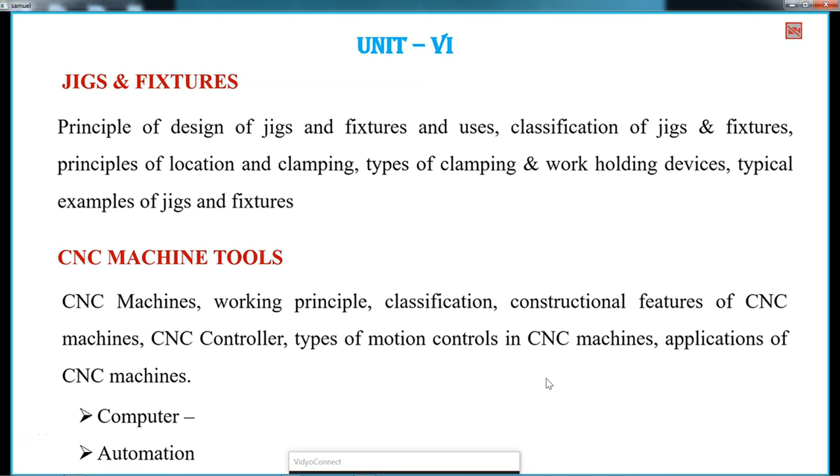We have been dealing with various topics in this course. I don't know if you recollect what we studied first. Can anyone say what the first unit was? Fundamentals of machining, where we studied the basic principles of metal cutting. So metal cutting is actually a metal removal process.

Somebody said that when additive manufacturing came, earlier manufacturing was negative, and now it became positive. So that's what they say. Manufacturing means removing the material and making the shape. But nowadays we have processes called additive manufacturing processes, where we build the wall or the structure where it is required.

So probably toward the end of this course, we'll talk about some of the advanced manufacturing processes, and in that we'll include even additive manufacturing, so that you are aware of the latest machining processes going on in the industry in the present day. So the fundamentals of machining means metal removal processes. Even the title of your course says metal cutting and machine tools.

So additive manufacturing, 3D printing, and all these layered manufacturing kinds of processes are not included in this. So probably we can ask your professors to revise some of the syllabus in the coming semesters, so that you will be aware of the latest developments in the manufacturing area and also in the industry.

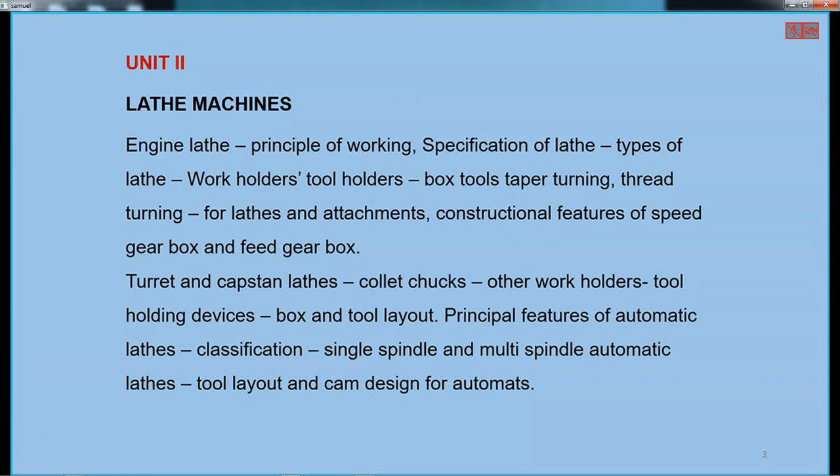So if you understand the basic working principles of the lathe machine, you can understand other machines easily. We have looked at the basic machine tool structure, various functions, and other topics related to the lathe machine. Next, we looked at the shaping machine, the slotting machine, and the planing machine. Lathe, shaping, slotting, and planing machines use the single point cutting tool.

Though literally it may not be a single point, it is not an edge, but a point or a small portion of the tool that makes contact with the workpiece. All these come under what are called single point cutting tools, and the lathe, shaping, slotting, and planing machines use the single point cutting tool.

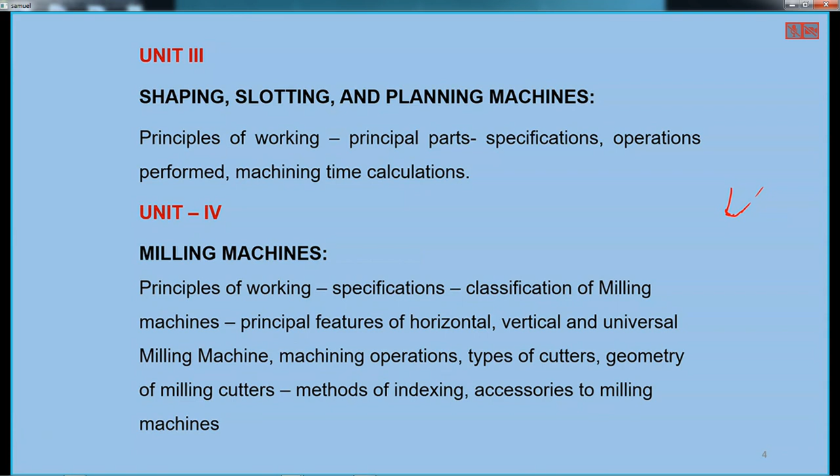Then later we talked about the milling process and milling machines. Milling machines use multi-point cutting tools to remove the material. We looked at various milling processes, the basic processes like face milling and end milling. Then we looked at types like up milling and down milling, various cutters, their geometry, their methods of indexing, and different types of milling machines, their structure, and their main components.

Then later we moved on to the finishing processes, after you do the basic machining operations. As I already said, overall manufacturing operations can be put as primary, secondary, and finishing operations. Primary operations generally include metal forming, casting, and forging kinds of processes, which give the basic shape to the component. Then we do the machining to bring them to the exact size, shape, and required surface finish.

Then under the tertiary processing or finishing processes, highly finished surfaces with high requirements of tolerances and surface finish can be achieved by using these finishing processes. And the basic finishing process is grinding.

We looked at the grinding process. Though each abrasive has a single point cutting edge which makes contact with the workpiece while removing the material, there are several such abrasive particles, and their sharp edges make contact with the workpiece simultaneously. That is the reason the grinding process also comes under multi-point cutting operations. Then we looked at different types: cylindrical grinding, surface grinding, tool and cutter grinding, and others.

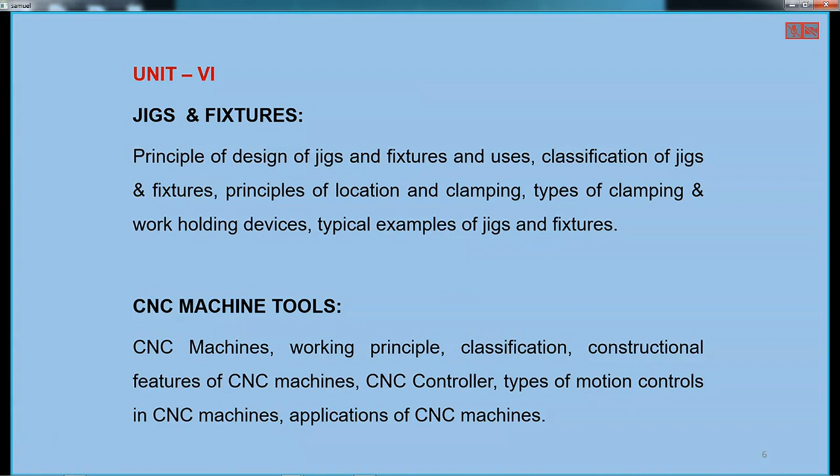So it is tool design. Tool design means it is not the metal cutting tool design. It is not the cutting tools, but here tools means the jigs, fixtures, and the press tools. That is the reason it is called tool design. The name of the textbook is Tool Design by Cyril Donaldson, George LeCain, and other people, but generally it is referred by Donaldson's name, who is the primary author. You can refer to that book for this particular unit if you need more information.

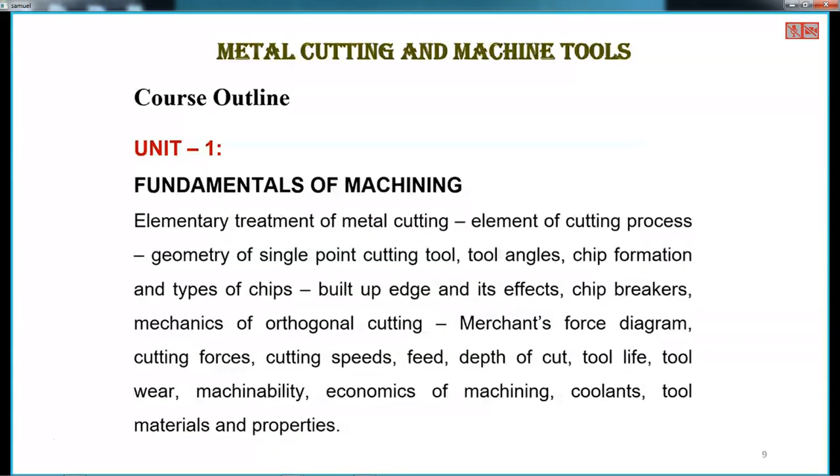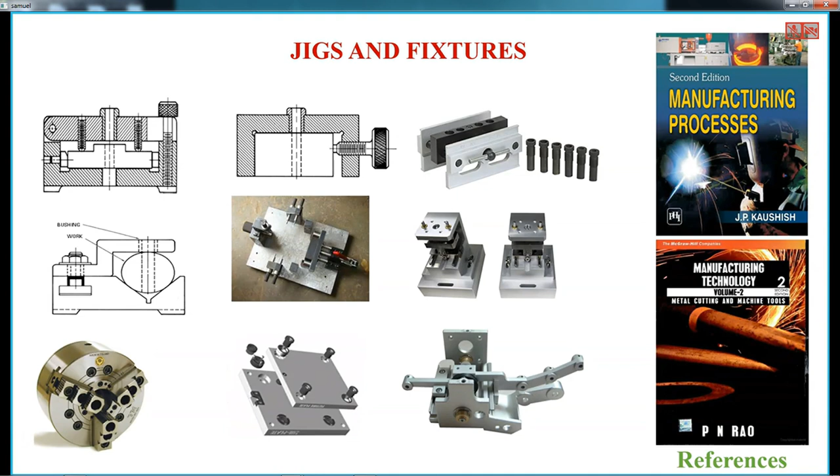Coming to the jigs and fixtures. If you go to the shop floor, you hear this term; in the workshops in your colleges, you may not hear them. Jigs and fixtures are more production kind of devices. If you go to any industry, without jigs and fixtures you can't work. So you need jigs and fixtures. We'll see what these jigs and fixtures are.

As I said, successful running of mass production depends on interchangeability to facilitate easy assembly and reduction of the unit cost. If you go to industry, you know what they'll be talking about? They'll be talking about production and cost. The technology assists them in achieving these two. Yesterday we had visitors from an automobile manufacturing industry, and they were talking about how production is important.

He was talking about the gearbox used in an automobile. In that gearbox, there will be 47 or several gears. If somebody manufactures only 46 instead of 47 gears, the cost of the gear may be around 500 or maybe 1000 rupees maximum. But you know what loss the whole industry faces if one gear is not there? Without one gear, you cannot assemble a gearbox.

If there is no gearbox, you can't assemble the vehicle. If it is a large truck costing about 50 lakhs or even higher, or a car costing around 10 lakhs, then if you don't make one gear, one car or one truck is less.

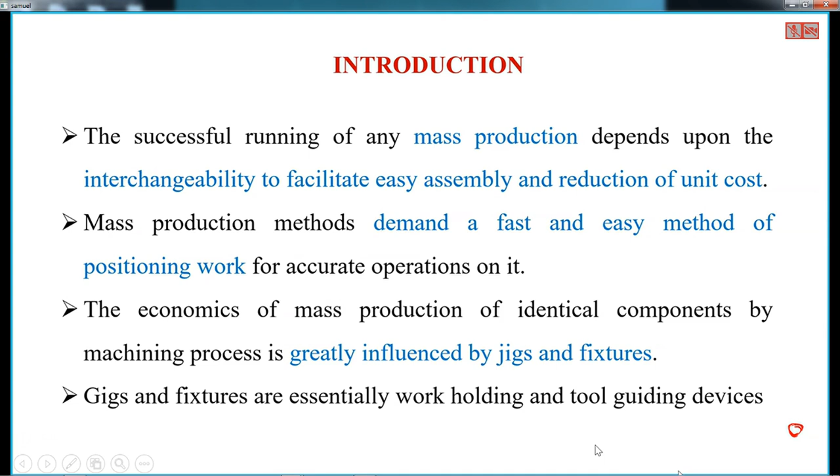I think our government has been taking so many initiatives like Make in India and other things. So you can join in those efforts and take the technology to a higher level. Okay, so instead of giving more of this introduction, let me go and define what these jigs and fixtures are. So you can see in the figure,

You can understand. Just a minute, there was someone.

Okay. So when you look at this figure, probably you can understand what these jigs and fixtures are. Fixture may be a term you have heard. Fixture is nothing but a work holding device, not like vises and other standard work holding devices, apart from the standard shapes. For example, if you have a prismatic part like a square or a cube, we can easily hold it by using the standard work holding devices.

Some of them we have already introduced while talking about the lathe, the drilling machine or the milling machine. So fixtures are not the standard work holding devices. For example, there is an L shape. What kind of vise can hold it firmly? We need to hold them rigidly, because when the cutting forces are there, when the machining operation is happening, and when the tool, or like in a lathe the workpiece, is rotating at a very high speed, there are chances that they come out.

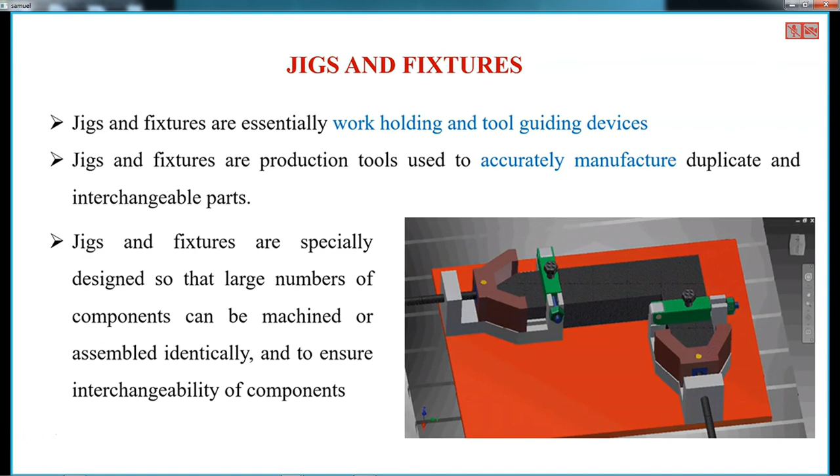Once here, something happened where, when we started rotating the tool at a very high speed, one of the tool inserts came out. Thank God it didn't come out through the opening, but it went and hit somewhere. It will have a velocity like a bullet, so it will be very risky. Nowadays in industry, safety is given priority. Even if work doesn't happen, it is fine, but safety cannot be compromised.

So thus you need to have a fixture which should be able to rigidly hold the part, in spite of it not having a regular shape. If it is a square block or a rectangular block, we can rigidly hold it by using the standard work holding devices.

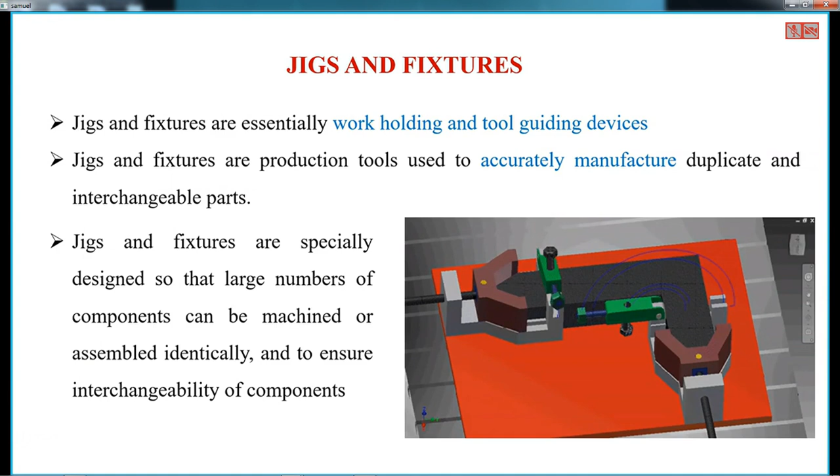But any irregular shapes like this, you cannot hold them. So you need something to hold it firmly, that is called a fixture. And then in simple terms, a jig is a device that helps in guiding the tool. So here what you are seeing is a pure fixture. I'll show you the jig, then you'll probably understand it. We'll be coming back and defining them and telling what the differences are.

So here you can see on the top right side, there are these holes. These holes are nothing but, this plate is a jig, and these holes are to guide the tool. So fixtures are work holding devices, and jigs are the ones which are used for guiding the tools.

See, earlier and even now, if you go to a shop floor, you see 70% of the machines are manual kind of machines, conventional machines. Maybe the other advanced machines will be CNC machines. If CNC machines are there, you don't need the jig. Obviously you still need the fixtures to hold the workpiece, but you don't need the jig to guide the tool, because you can program it with the XYZ coordinates.

So in the second part of this unit, we'll be looking at how to program the CNC machines so that the tool can go to the required place and carry out the machining. But when we don't have that kind of CNC, that is computer numerical control machines, where it is semi-automated, where you need the manual operator to guide the tool and do the machining operation, we need these jigs.

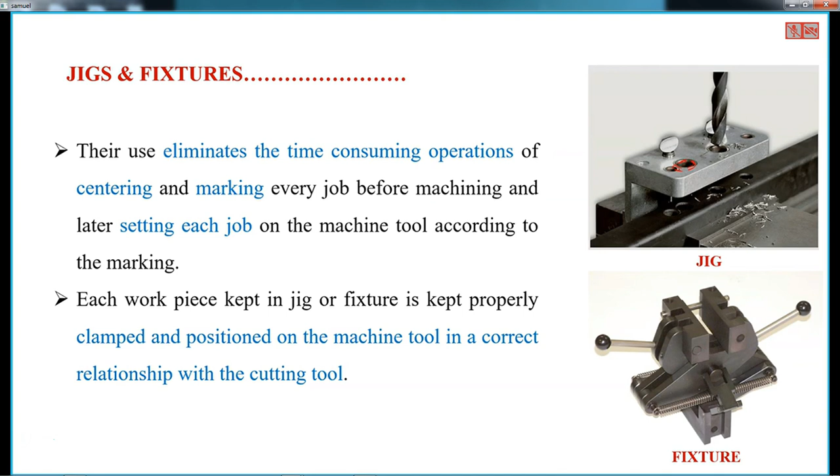So we'll go forward. Importance of jigs and fixtures. For large scale production by semi-skilled operators, we need these jigs and fixtures. To define the relationship and alignment between the cutter or the tool, we need the jigs and fixtures. And to maintain the precision and accuracy, we need these kinds of jigs and fixtures.

So for example, I think you would have worked in your workshop. If I have a 5mm workpiece like this, and you want to drill maybe 4 holes like this and a center hole, how do you generally do this operation? How do you do this operation? Think that you are given a PCD, pitch circle diameter, of maybe 70 millimeters. You need to do it exactly, and this angle should be 90 degrees each. So how do you do that?

The general practice in any shop will be, if it is only a single plate, we take it to the height gauge, kept on a surface plate. Then we draw the cross lines like this to locate the center, then we take the divider, take the particular radius, draw a circle there, or take a punch and mark that center. From there we draw a circle of 70 millimeters. Then we take the tri-square and mark 90 degrees, and wherever that circle meets this 90-degree line, we put a punch telling that that's where we need the holes.

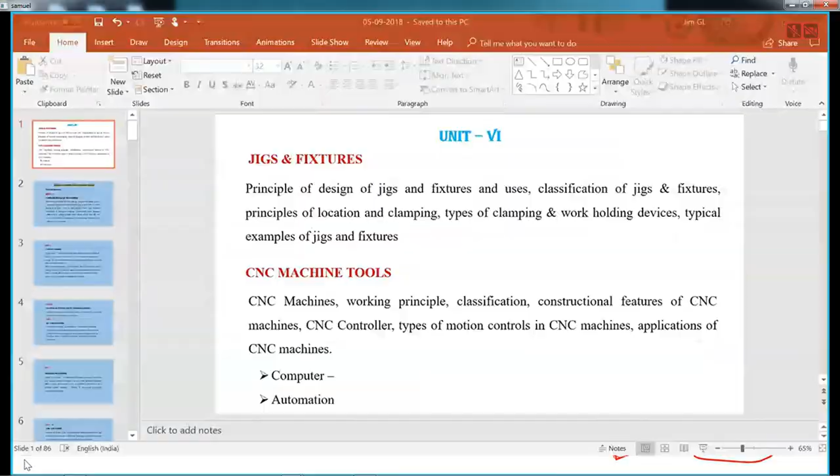So what was the sound I heard? Okay. 1 minute. Okay, that's what was making sound.

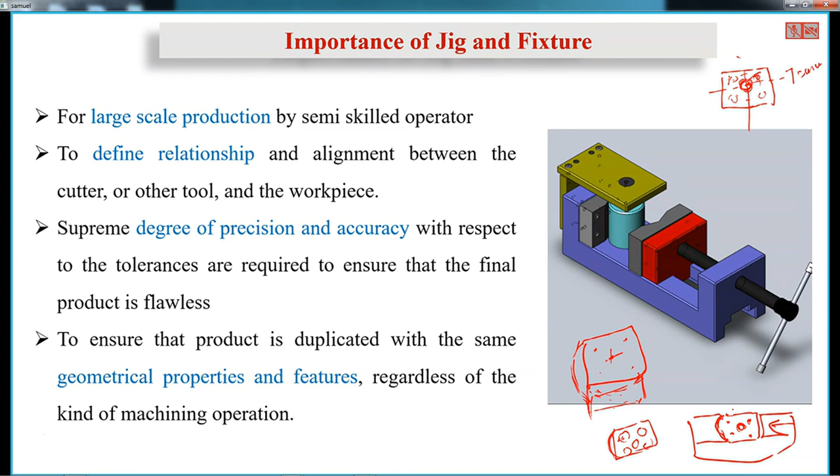Okay, is it clear now? What is a jig and a fixture and their importance? So usually in your exams or the question paper, the question will be there, what is a jig and what is a fixture and what are the differences between them? So later I'll be telling you another fact. So maybe I can tell right now.

Though jigs and fixtures are two terms and we call them separately, literally in the industry when you go, you find that both jig and fixture, it is not a rule, but most of the time you'll find them as an integral part. Why? Because you need to hold the workpiece and you need to machine that workpiece. So there'll be a jig and a fixture into which or on which a workpiece will be put, it will be clamped, and then the machining operation will be done. So many times both are integral parts.

But if somebody asks what is a jig and what is a fixture, you need to tell these differences. So jig is a work holding device that holds, supports and locates the workpiece and guides the cutting tool. So this definition they have put, but to be more specific, I can strike off all these things and say jig guides the tool for a specific operation if it is only a jig.

But many times the jig and fixtures are interchangeably used. So that is the reason they say it holds and guides. That is the general definition. But if you want what is a jig, it guides the cutting tool. So jigs are generally fitted with hardened steel bushes.

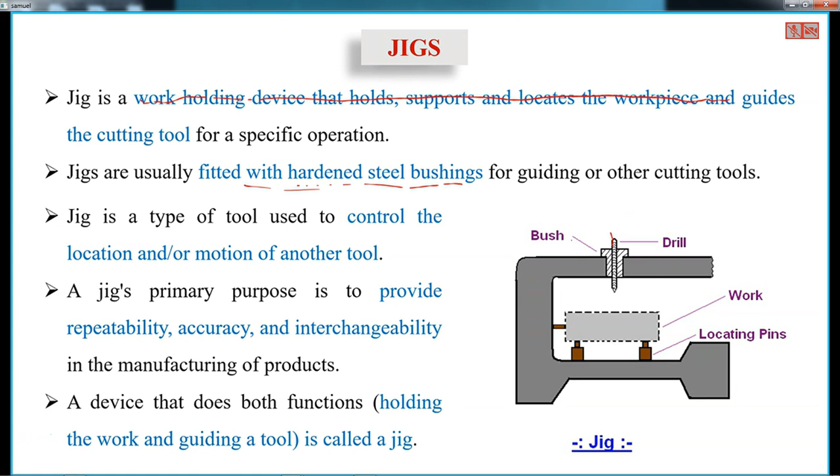So you can't locate it exactly. In that case, what they do is they'll remove these bushes and place a new bush. So thus you don't have to change the whole jig and fixture, but only the bush. So that is the reason you find that they'll be fitted with the bushes. So remember that jig is a device that guides the tool.

So one example of a jig you can see here. What you see here, the white ones, are the steel bushes. So this is the jig. The blue color you are seeing here is the jig, and the white ones you see here are the bushes. So the drill bit actually will be going through that. So this is an example of a pure jig.

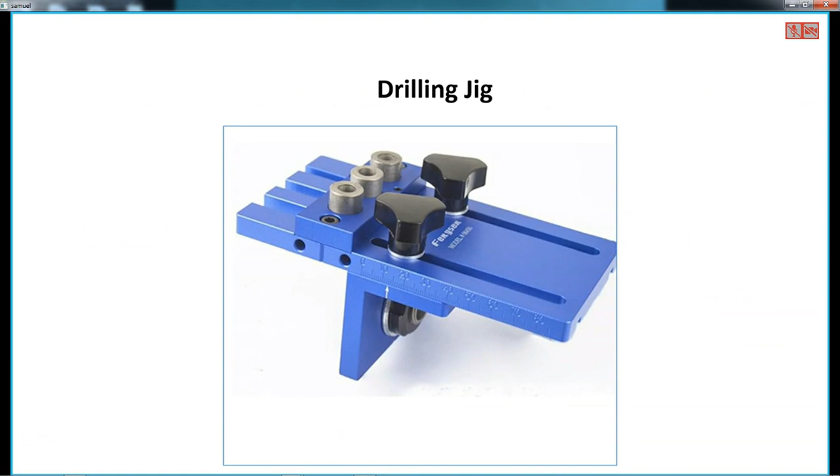Then what is a fixture? A fixture is a work holding device that supports and locates the workpiece for a specific operation, but it does not guide the cutting tool. So if it is a pure fixture alone, it only holds the workpiece. And then location, that is important. We'll later look at the principles for locating the workpiece. So that is also important.

Otherwise, if you don't locate it properly, however accurately you machine it, even in CNC, if you keep the workpiece somewhere instead of keeping it like this, and then you accurately drill the holes, your center hole will be here. These PCD holes, from the example I gave, will be here. But what you actually wanted is at the center of the plate, and that doesn't happen. So to make it happen as you need, you have to place them appropriately. You can't just place it anywhere on the table and start the machining operation.

Sometimes when new operators are on a CNC machine, they do this. They fix it somewhere and then start the program. They find that half of the machining happens on the workpiece and the other half outside it, or sometimes even the work holding devices get affected. So thus we need to locate them. That is another tricky job. We have some slides on that, which we'll be looking at a bit later.

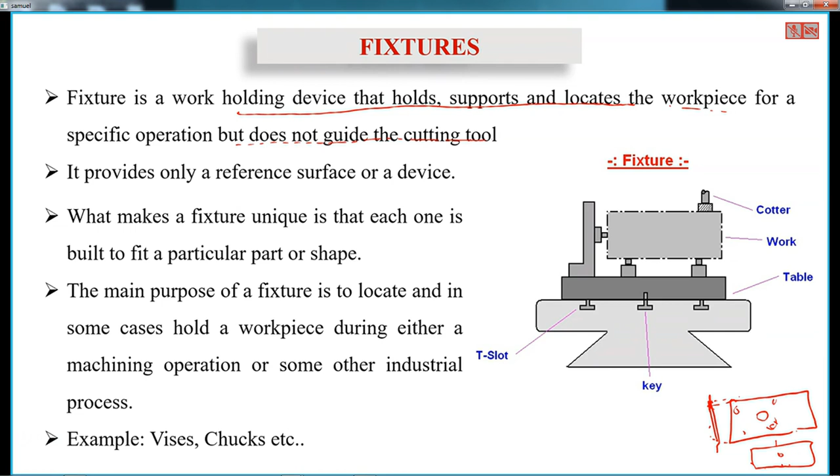So a fixture is the one which helps us in rigidly holding the workpiece on the machine tool. And it also locates the workpiece in the right position. When you look at some of the examples, you can probably understand these location principles. As of now, remember that it holds and supports the workpiece.

So this is one example of a fixture. This is a connecting rod, and you can see these are the fixtures. They are not a standard shape. If it had been a rectangular plate or something, you could have used a standard work holding device. But for this, you can't use a standard work holding device. If you hold them, they will escape and fly away. So thus, we need to hold them. These things are the fixtures.

But you also see these pins here. I'll explain about those. Those pins are the locators. So putting it in the right position and fixing it are both important. We'll talk about these locating pins a bit later. But as of now, remember that this is the fixture which is used for holding the workpiece.

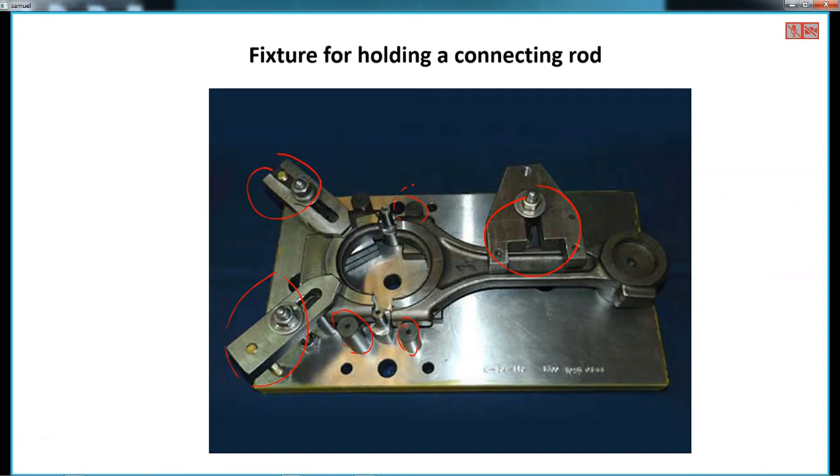So now the differences between a jig and a fixture. You can see here, the part which guides the tool is the jig, and the one used for fixing the workpiece is the fixture. But usually the whole jigs and fixtures will look like the figure on the left side, where there will be a fixture and a jig as an integral part. So you can insert a workpiece, fix it, drill it, then unwind this one, remove the workpiece, and put the next one. So you can keep going on.

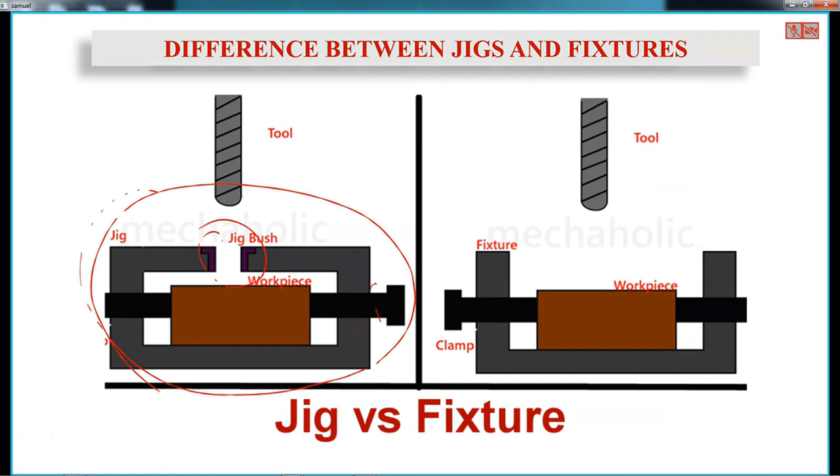So the differences between jigs and fixtures are listed here. You can just look at them for a minute and read the differences between jigs and fixtures. These are important from the examination point of view.

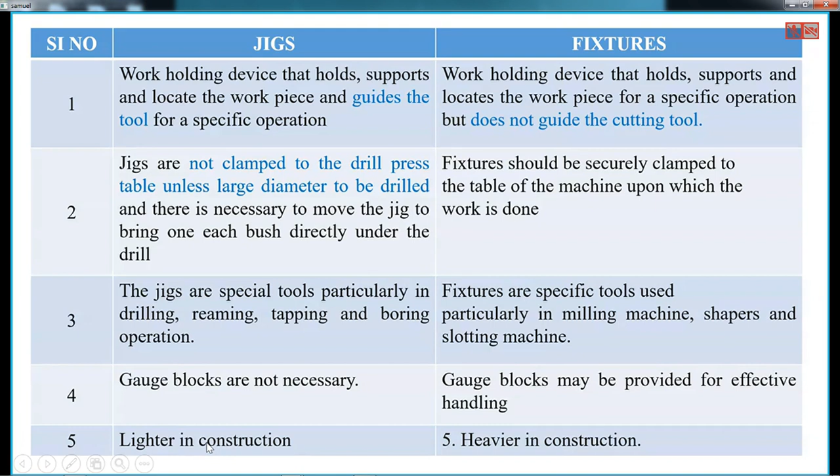So another way to find out what is the difference will be, jigs will be lighter because they don't need to resist the cutting force. So the advantages of jigs and fixtures, as already we have been telling, jigs and fixtures increase the productivity by eliminating the individual marking, positioning and frequent checking.

The operation time is also reduced due to increase in speed, feed and depth of cut because of high clamping rigidity. So when the workpiece is held, you can use the higher cutting forces. So thus you can increase the speed, feed and depth of cut.

Then skill reduction. So even an unskilled operator, when you have the jigs and fixtures, he can do the job and consistently. So sometimes what will happen is, worker when he's in the morning, when he is fresh, he'll do the job with a high quality, but by evening when he's tired, the quality will not be the same. But now with the help of this, even though the operator may be tired, still the workpieces what you produce will be of the same quality.

Then interchangeability. So we can actually change the parts. So all of them are made similar. So thus you can remove one part and put another part which has been manufactured a bit later. So all will be similar, but not exactly the same. So always remember, in manufacturing, you can never make two exactly same parts. They may be identical, they may be similar, but they won't be exactly the same.

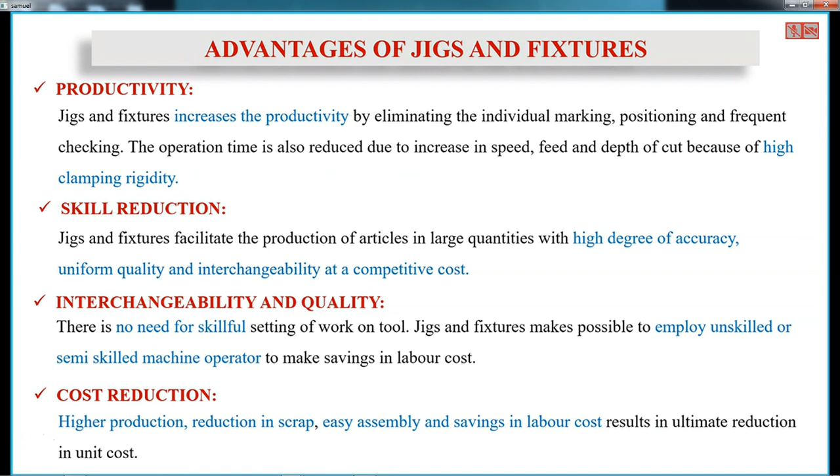Cost reduction, and obviously you can reduce the waste, because if you put the holes in the example I gave wrongly, they don't get assembled properly, then you may have to throw them, scrap them, and the cost will be lost. But now production rate will be high, at the same time the wastage will be less.

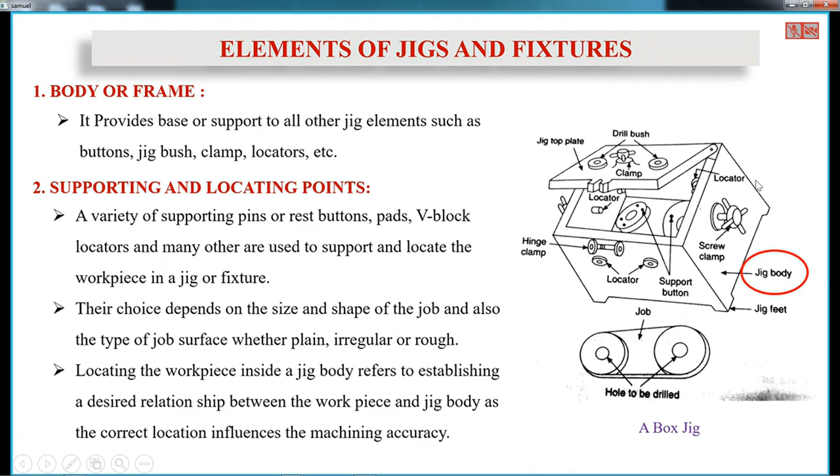So the next one is about the elements of jigs and fixtures. I think before we go into this, if you look at the video, probably you can understand.

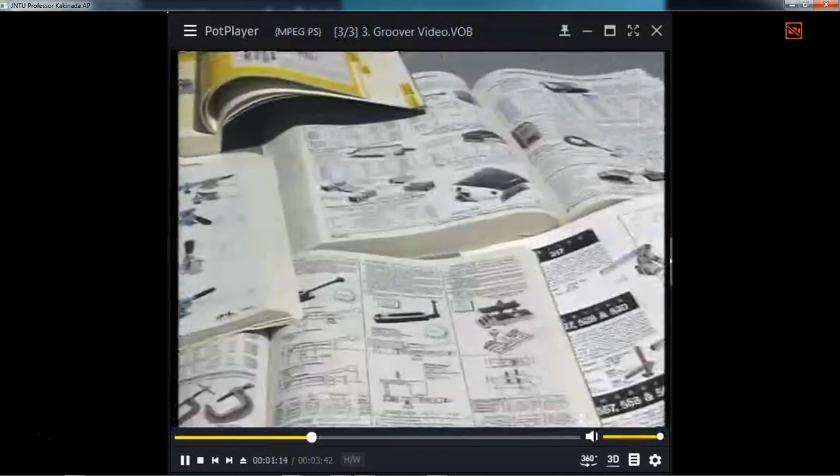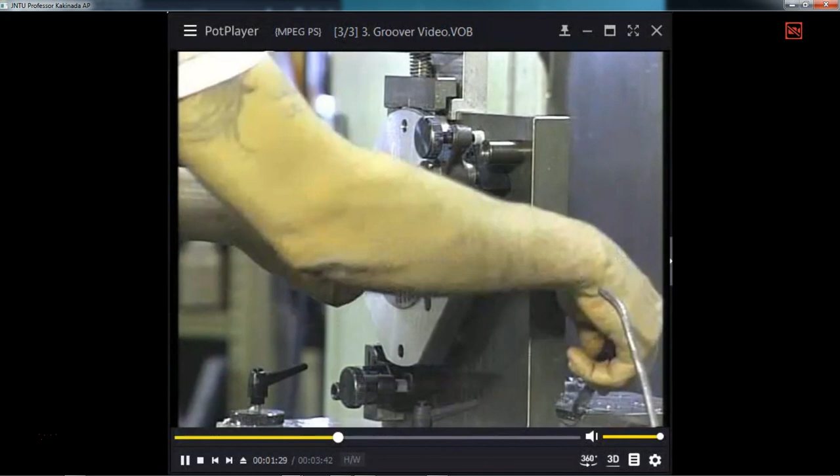And as fast as possible. And for economy, standard catalog items must be used where possible. A machined part has certain planes, lines, and/or holes from which other points are measured. These reference points or planes are called datums. To correctly machine a part, it must be held in a setup that guarantees a definite location or position and orientation in space with respect to the part's datum points or surfaces. This must be repeatable part after part.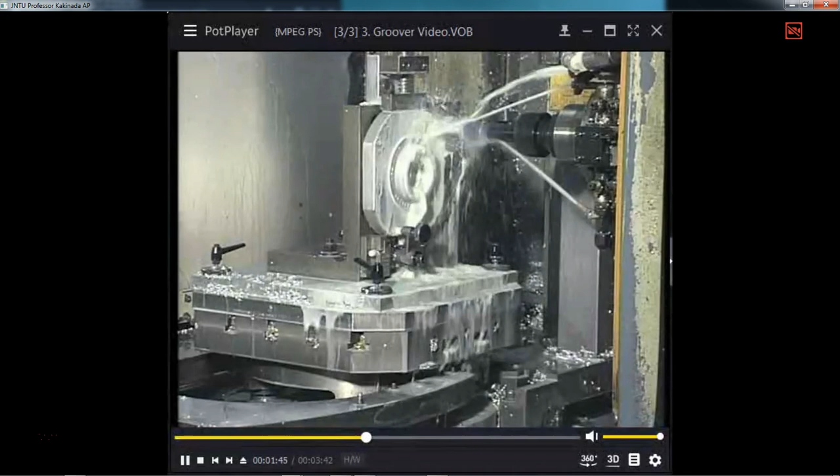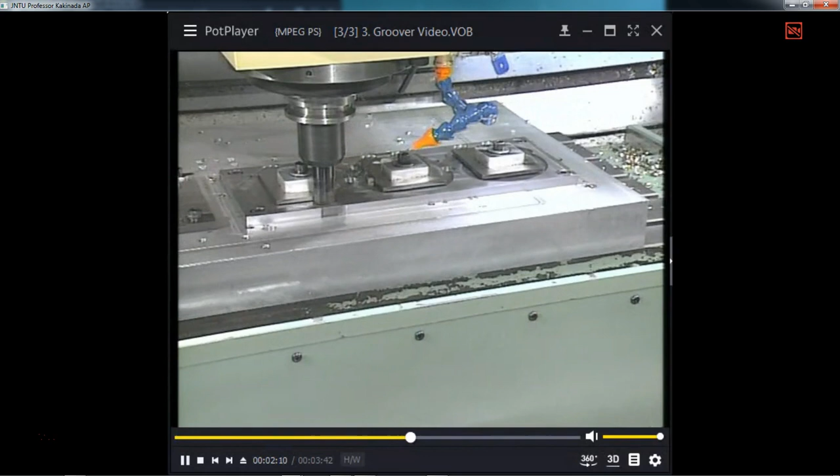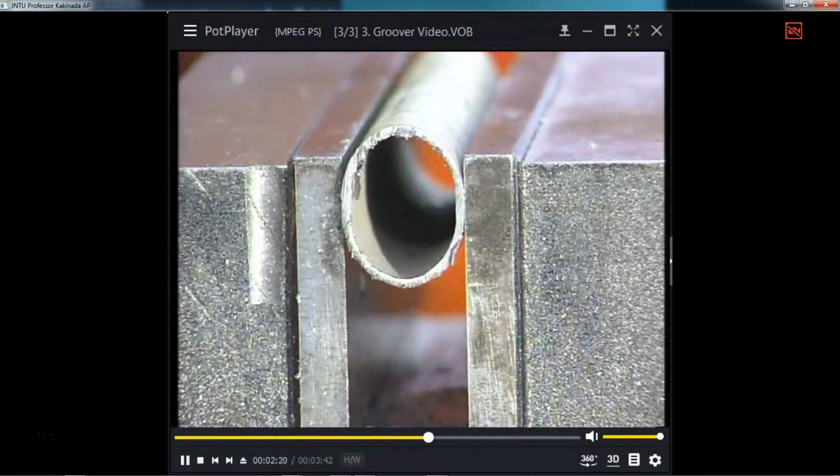Secondly, the work-holding device must hold the part securely in position while cutting forces, vibrations, centrifugal force, and gravity act to dislodge it. In theory, the location and clamping of workpieces are considered separate issues, but in work-holding practice, locating and clamping are integrated as part of the same process. The holding action ensures the workpiece is stable for machining once located. If not restrained adequately, the workpiece will move and become scrap. Conversely, the clamping force must not be inappropriately excessive, so as to distort, gouge, or break the workpiece.

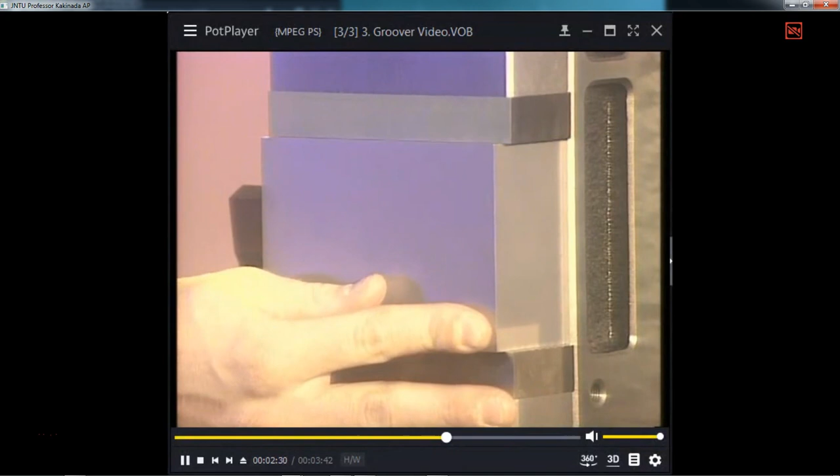The 3-2-1 locational method is suited for rectangular parts located by their outer edges. With this method, 6 points of contact, or locators, on the faces of an object cancel 9 of the 12 degrees of freedom. These 6 contact points include 3 primary locators, 2 secondary locators, and a single tertiary locator.

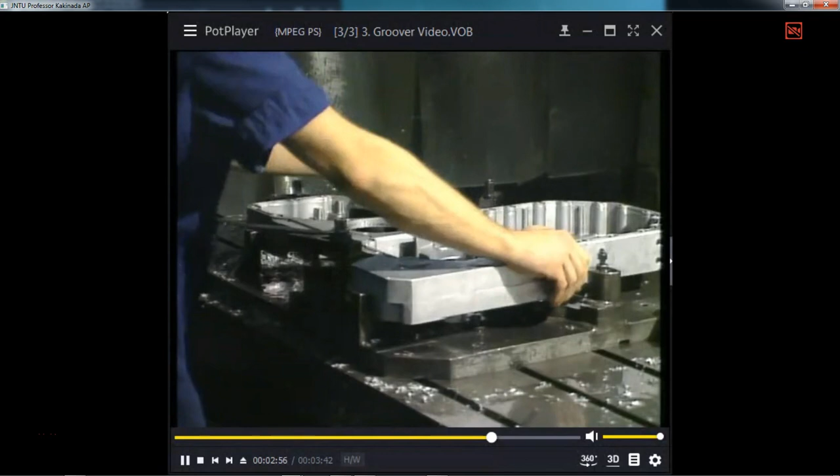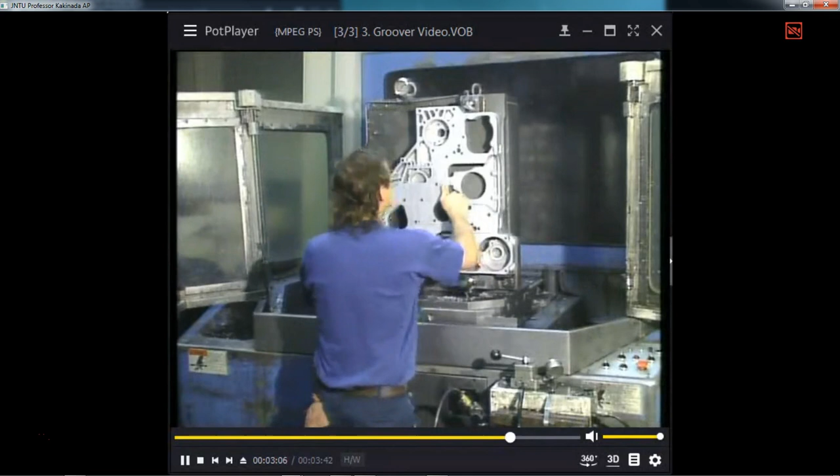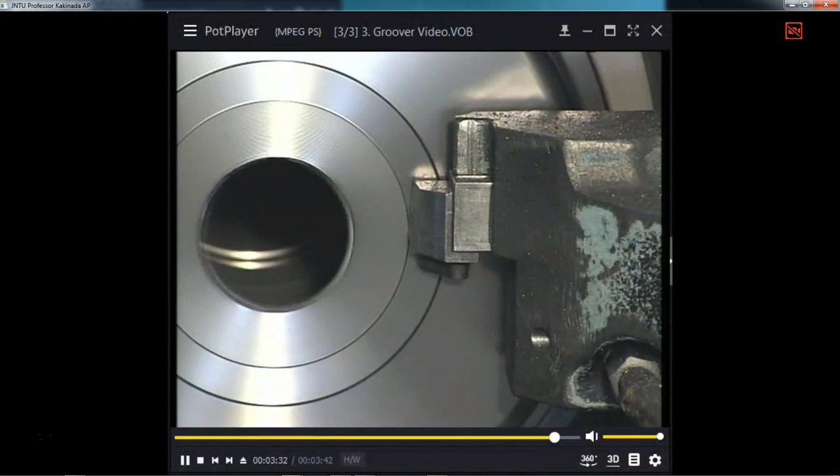For accuracy and productivity, as many operations as possible should be completed in a single clamping. Reclamping or rechucking have 2 negative impacts. First, when the workpiece is moved, the location of the workpiece in relation to the machine tool is lost. That compromises the accuracy of the part. Secondly, setup time doesn't add value to the workpiece, and machining time is wasted at each unclamp-clamp cycle. Although a single clamping is ideal, 2 or more clampings or chuckings may be required when datum surfaces must be machined first, or a through hole has steps on both sides, or a part has blind

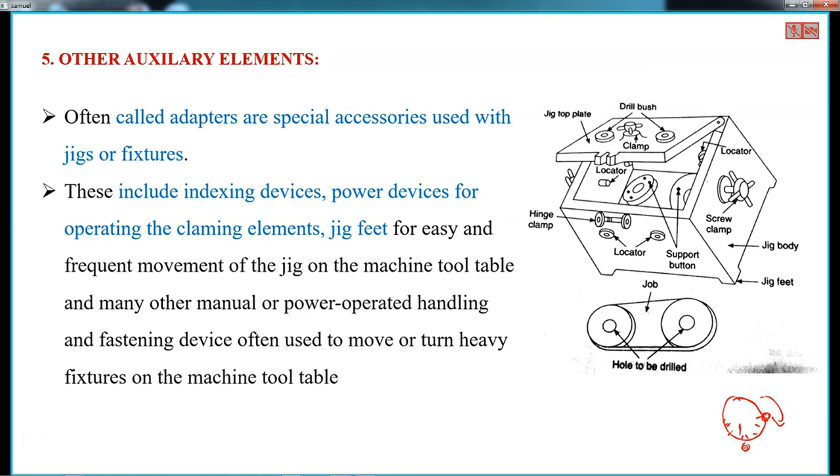As we have seen in the milling machine, there can be indexing holes like this. There'll be a handle with a pin which will be sitting in this hole. Pull it out, move it to the next hole and fix it, so you can index. Even those kinds of devices can be there. They're all called the auxiliary elements. So these are the various elements which will be there in the jigs and fixtures.

Then what are the principles of jigs and fixtures? I think some terms you'd have heard in the video, what is called a datum, datum plane and all. What is important in manufacturing is that whenever you fix a workpiece, you should be able to finish all the operations within one setup. If you can do that, that will be the best. Generally the bottom surface will be machined and then made as a datum surface. Datum is nothing but reference.

So why is that reference very important in manufacturing and also in measurement? It's because if there are any errors in the datum, all the machining, whatever you do, will be going wrong. And the measurements you do will not be reliable. For example, think that I have fixed this workpiece on a milling machine, and I want to do the facing operation, so mill this top surface.

If I don't keep it horizontally, if my workpiece is loaded inclined like this, then when I machine the top surface, finally my bottom surface and top will not be parallel to each other. But usually our requirement will be like this, where we want the top and the bottom surface to be parallel. So it's not because of a wrong machine or wrong machining operation. Everything is good, but because you have not fixed it properly, because the reference is not good, you can't get the accurate part. To avoid that, generally the reference surface will be machined.

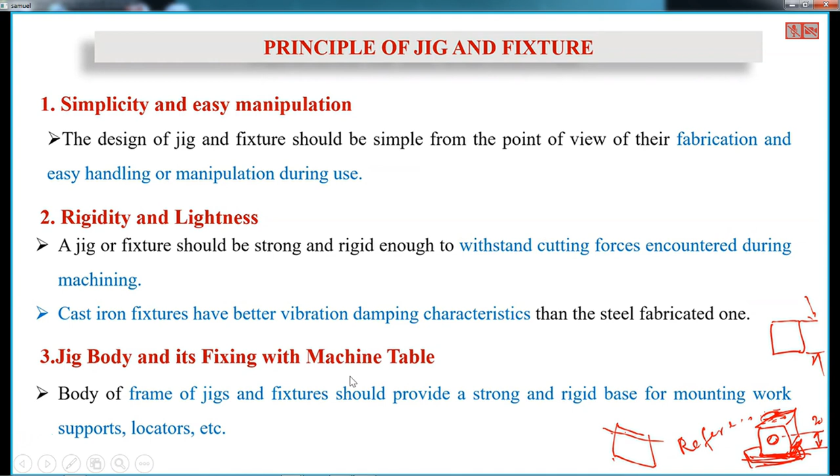Then the jig body and its fixing with the machine table should be taken proper care of, and it should be strong enough. The other characteristic is loading and unloading: it should be easy for anybody to put the workpiece in, do the operation, and then you should be able to remove it quickly and easily.

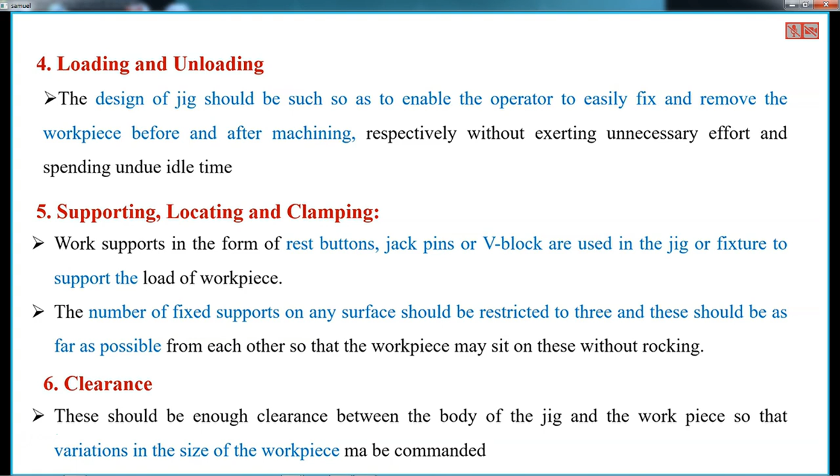Then supporting, locating and clamping. The term locating always comes up, so it is important. The resting buttons, the jack pins or the V blocks, whatever we use, should be of appropriate shape and size. Then clearances: there should be enough clearance between the body of the jig and the workpiece so that the variations in size of the workpiece can be accommodated.

And also there should be a place for the chips. In case you make your jig or fixture a very closed one, when you machine it, where should the chips go? Usually if you look at the design of jigs and fixtures, there'll be a gap left, something like this, where the chips can come and later be disposed of. So there should be a place for the swarf, chips, and other material to be removed.

Then tool setting and guiding. The fixture should be designed in such a way that minimum time is consumed in setting up the job, and also for guiding the tool.

Then ejection. The workpiece should be ejected mechanically from the jig or fixture when it is unclamped. That is always desirable. Usually they'll have some type of springs inside. Once you clamp, they'll be compressed and held in place. When you release the clamp, they push the workpiece up, it automatically comes out of the jig, and then you can remove it more easily.

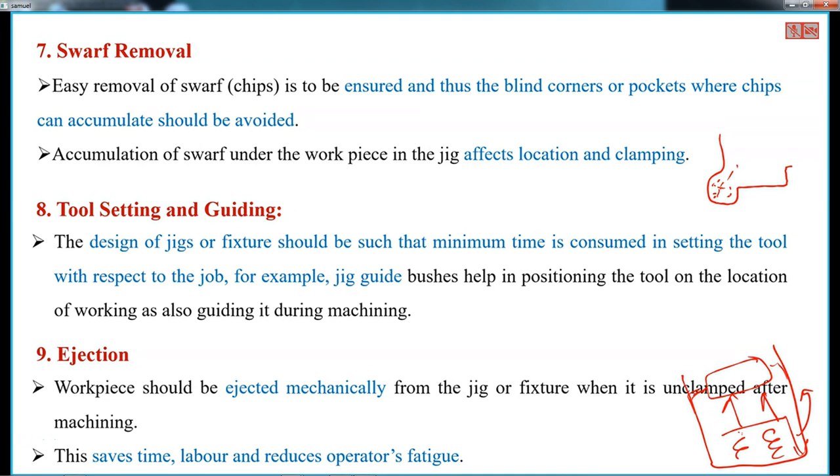If it is inside a box kind of structure, it may take time. So now it will just come out like this and can be easily removed. The next one will be placed and then you press down the clamp, so it gets seated. That is the kind of arrangement that will be done. So there should be a provision for ejection.

Then another important thing is foolproofing, where there should not be a chance for the workpiece to be loaded the wrong way or the machining to be done the wrong way. Even if you look at our electrical plugs, there'll generally be 3 pins, not 2. In some cases it may be 2, but generally it will be 3. And if you look at your cell phone charger, one side will be wider like this, the other one smaller.

And probably you have looked at your computers and the pins for the projector or other things; either there will be an edge like this or the shape will be asymmetric. The pins go into the assembly, and there may be an edge smaller on this side and larger on the other side. So there is no chance you can put it in the wrong way. If you do, the assembly itself will not take place. It is a built-in safety so that you don't connect it the wrong way and spoil your devices.

In a similar way, in jigs and fixtures, if you place the workpiece wrong, the clamping will not happen and you can't close it. So the operator will check, oh, there is something wrong, and then he'll set the position right and clamp it.

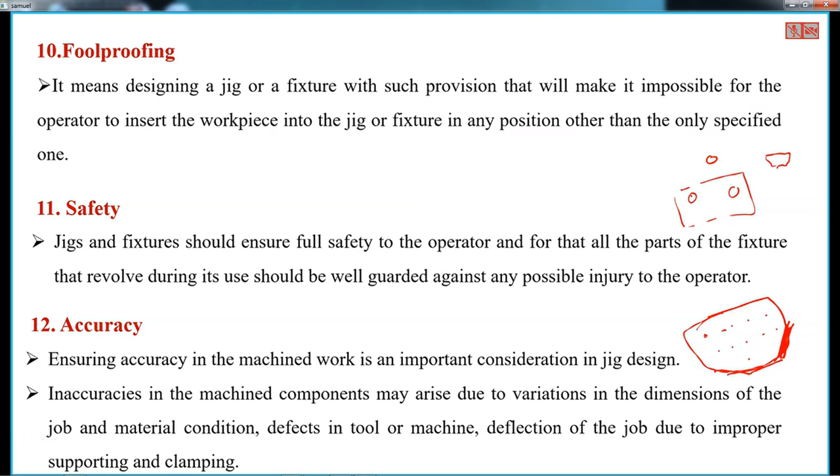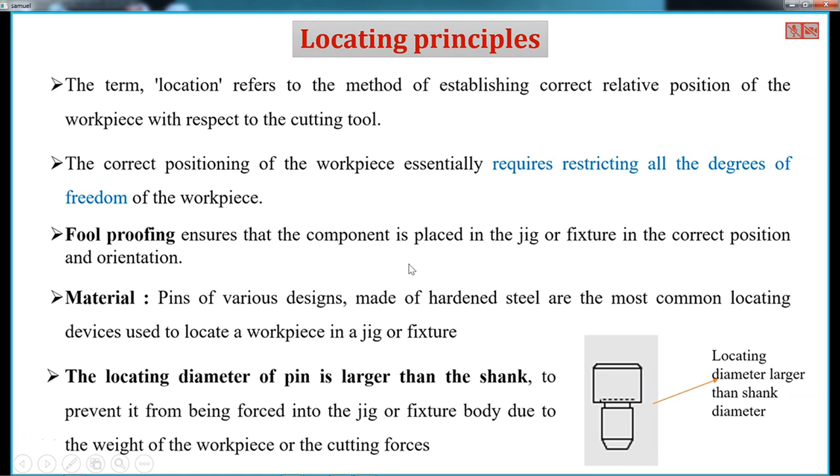Then accuracy. The workpieces you are going to get should be accurate, so the jigs and fixtures you use must also be accurate. Otherwise your workpieces will not be accurate. So these are the different requirements of jigs and fixtures. The remaining part, about locating principles and other things, we'll see in the next class.